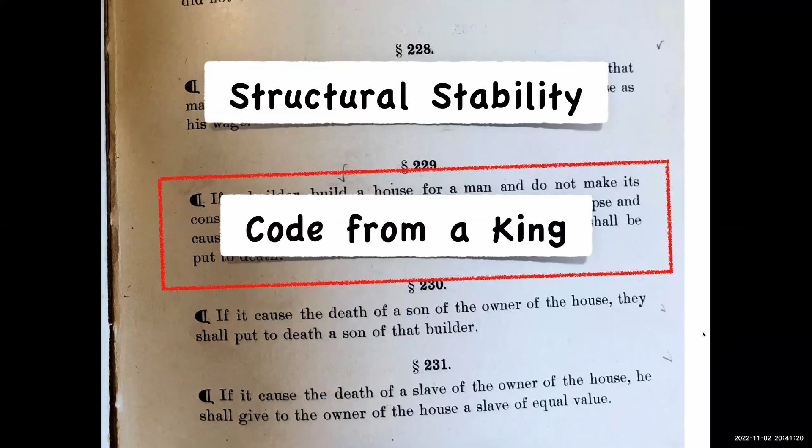It's very top down - essentially structural stability. I'd say that's the first code we had, focused on structural stability. And this was a performance code - there's no recipe here to tell you how to do this, to help assist this builder in building this house. It's simply establishing the performance that's required, and if you fail that performance, well, then you've got your consequence.

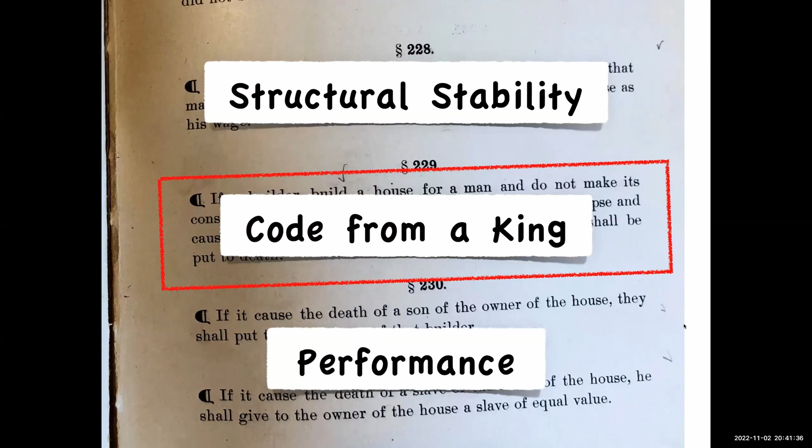Now we can move on. I told you we were going to talk about religion, didn't I? I gave you the warning. Let's crack open Deuteronomy 22 here. And what do we have?

We have number 8: 'When you build a new house, make a parapet around your roof so that you may not bring the guilt of bloodshed on your house if someone falls from the roof.' So is that arguably older? Well, who knows? Let's see what we have here - that is fall protection, right?

So I'd say guards maybe is our second code that we ever saw come around. But I'd argue, I don't see anything there saying make a parapet to keep someone from falling - so maybe it's really guilt protection. Because that seems to be the performance expectation - the goal, the purpose of this code is about protecting your guilt, not protecting the person. Well, there's an example of what code would look like written from God, and you can reserve your opinions of the author.

But let's move along, because parapet - if you look at parapet in the natural world, if you go to just normal definitions, indeed a parapet is a guard of sorts, to prevent you from falling over, to prevent you from getting shot by an arrow with the attack of the castle. But as you see in the photo I have here today, parapets are different in building codes.

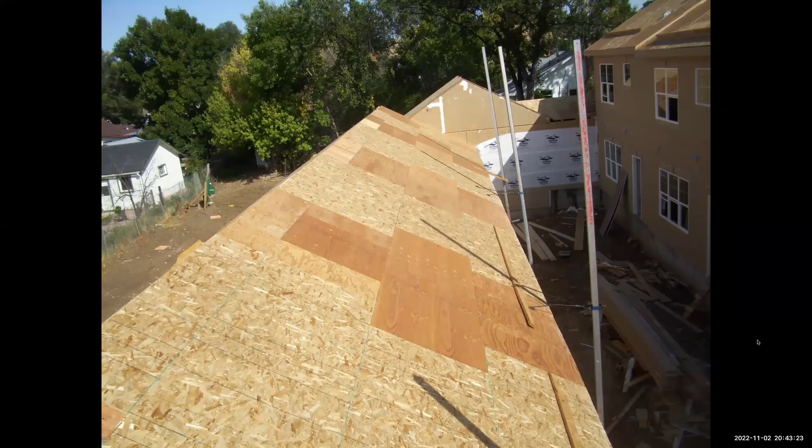These multi-housing units, say 5 families in one building - what are society's expectations? Society's expectations are that we have zoning ordinances in our cities. We don't want to look like some trashy city with a bunch of multifamily and all these freaky parapets. So the zoning ordinances across this country want it to look like one beautifully architecturally designed structure, essentially eliminating the parapets. And what we see used is an exception to parapets.

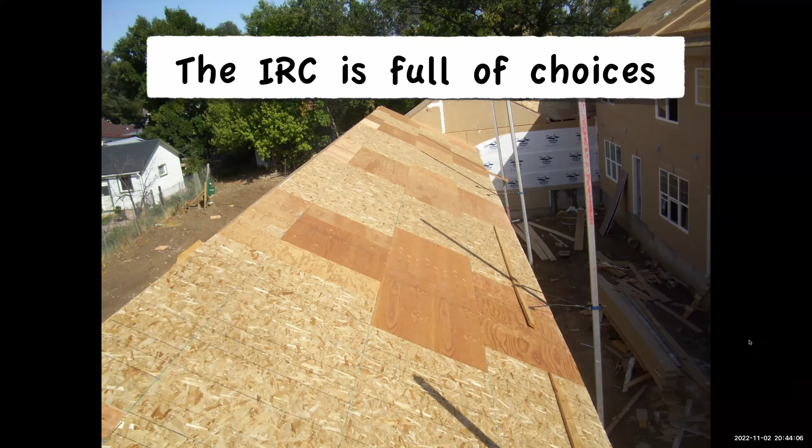The exception's almost the rule, and that's the fire retardant treated... The purpose of this is to show you the IRC is full of choices, but the old methods are still there. You can still build an extension of your firewall into a parapet for your fire separation between townhouses. But you can also do this - there's another method with drywall. If people just look at the code as a book of government mandates and never open it up to explore it for themselves, they don't realize the enormous amount of free choices they have.

Let's move along in time and hop up to 1808. This is one of the prized pieces of my collection - it's the newspaper, the Washington Advertiser, from January of 1808. In this, there is an article where the President of the United States and his declarations of building codes are reprinted. You can see that right here.

Now, who's the President of the United States on the 17th day, October 1791? Those of you that appreciate American history will recognize how that date is really close to the birth of this nation. That's George Washington, our president. George Washington was writing codes for the city of Washington. And what was his code? All outer walls of houses shall be made of brick or stone with slate or tile shingles.

Yeah, that sounds like the code of a president, right? The one percenters. You know, though, as you read further, it says, well, even though we knew that stone and brick and slate and tile would certainly eliminate the fires burning our cities down - I mean, that's the perfect solution - but this act was found to impede the settlement in the city of mechanics and others whose circumstances did not admit of erecting housing authorized by this act.

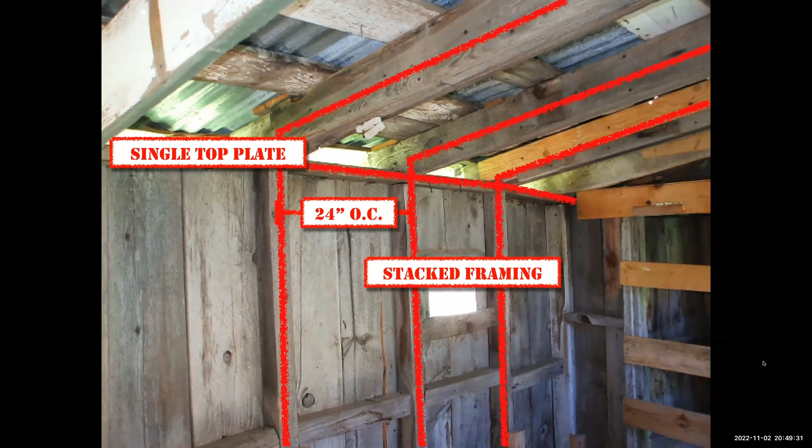All right, let's fast forward in time a little bit and hop into 1892 and look at the rest of the cities in the US. Because remember, the presidents could only enact things for the city of Washington.

I said I may ruffle some feathers with some tougher discussion in this, but that's how I roll—I'm a realist. This is a voted and elected position, elected representatives leading cities, your mayors and whatnot. The city reflects their quality of politicking or whatever. How good of a politician they are is reflected in how great their city is. So if your city is catching fire every few years and burning down, well, that's not making you look so good, is it?

So what's the motivation? What might be behind the scenes in motivating the development of these codes when they're written from folks that have to be worried about getting elected again, and how nice their city looks in case they want to be city manager or mayor of the bigger city nearby in town? Well, that'll be a tough job to get elected for when your town's burning down.

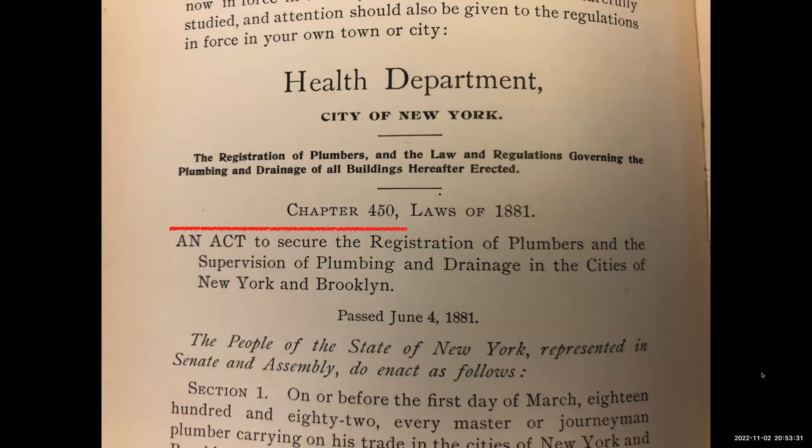Well, I've got this prize from New York. And if you're looking for sanitation codes, plumbing codes, the term plumbing code is only going to take you so far. To go way back in history, you have to start searching the health department for health codes. And doesn't that give a clue of the intent and purpose of the origin of our concerns with plumbing? Our health, right? We're dealing with the need for potable water to put in our body, as well as the awful stuff that we send out of it. And so it was all wrapped around protecting society for their health.

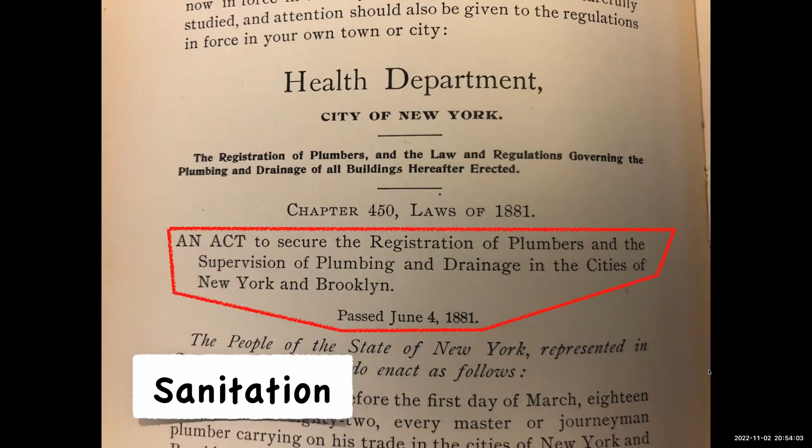Now, this is 1881. In the plumbing and drainage section in 1881, it said suitable drawings and descriptions of said plumbing and drainage have to be submitted and placed on file in the health department. They have to be reviewed and approved.

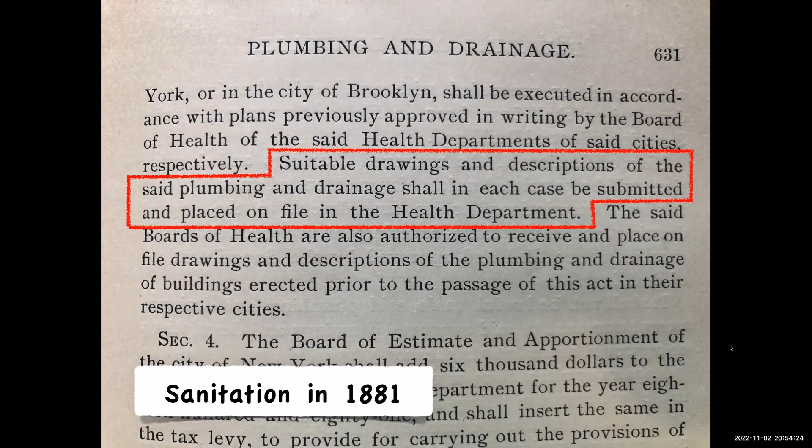1881. Now, I want to pause and give you some pulse of 1881. In 1882, the Edison Electric Illuminating Company in New York was formed and brought electric lights to Manhattan. So we are talking about the dawn of no longer lighting our homes with candles. That's how old we're talking.

Have you guys ever seen the movie Gangs of New York? This movie was set in 1862. And those of you that have seen this movie will understand this joke: I do not want to be their plumbing inspector to turn down any of these guys' plumbing, nor would I have wanted to ask them to review and approve or submit plans. So I tell you, your plumbing inspectors were pretty tough back in this day. And if you haven't seen the movie, it's relatively violent, and it was actually an entertaining movie.

So what else did we have? This is still in that health code for 1881: heating, cooking, and illumination. And there was this crazy new concept coming along, fuel gas. It tells us the use of gas for fuel and illumination have increased enormously within the last decade, and there's a general tendency among manufacturers and also among domestic users to employ gaseous fuel in preference to coal whenever practical or practicable.

There was also some interesting language back in these old books. So what I find interesting here is this speaks to society's expectations, and their expectations changing as our technology and available resources were changing and expanding. But what we saw back in the past with code development is, like I said, with the IRC, we can maintain and still allow the older methods - make sure they're safe, make sure they're done correctly - while still embracing the new methods.

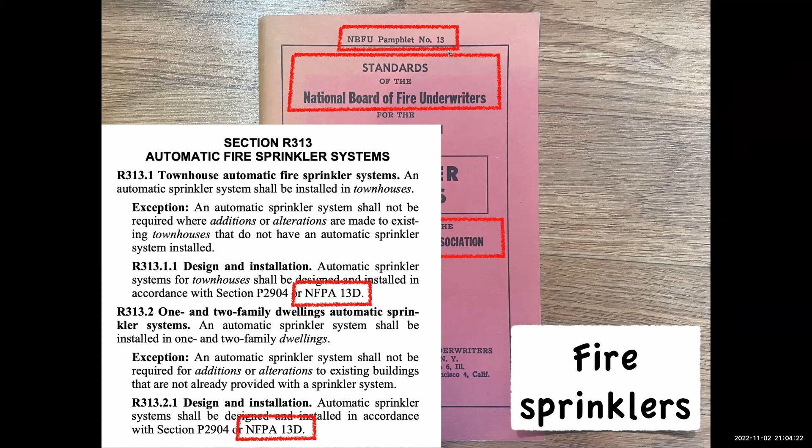What else was born? We can thank the Board of Fire Underwriters also in the late 1800s and early 1900s for supporting the National Fire Protection Association in creating the NEC. And you see it again in this old NEC book of mine, sponsored and paid for by the Board of Fire Underwriters and recommended based on the professionalism and experience of the Fire Protection Association.

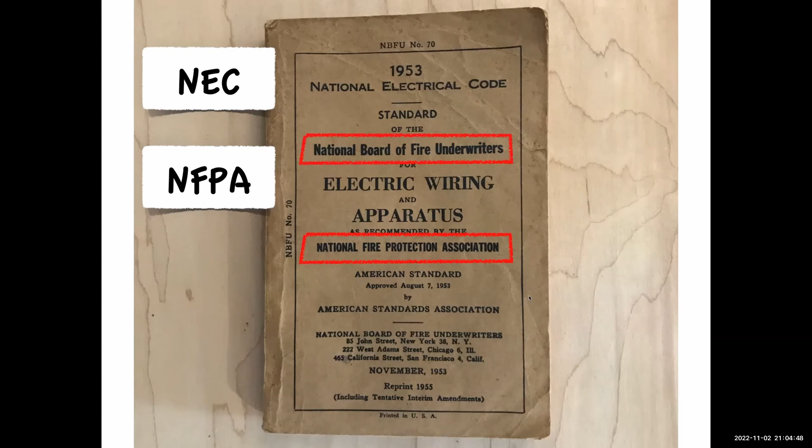And what do we see now? Now what we have is code drafted and developed from the fire industry. Of course, these organizations that led this development had a very open door policy, lots of people involved. So now we still have NFPA 70. Notice the same concept: it used to be NBFU number 70, and now it's NFPA 70.

But what's another thing we might do to protect against fire? This is where the NFPA, something now promoted and moved along by the NFPA, not the national board anymore, after the NFPA has been created, says, hey, we're not just about protecting our dollar investment of having to pay back a burned down fire or city. We actually care about the human lives as well.

And the National Board of Fire Underwriters did as well—I don't mean to say it that way. But what was realized is maybe we can't put all the fires out. Maybe we also need to think about egress. So in the early 1900s, I think around 1918, maybe the first edition, a code called the Building Exits Code was developed.

This is the first time we started studying egress behavior from panicked occupants. How many exits do we need? How far apart can they be? Related to that is a time factor: how quickly are these buildings burning down? That's all part of the analysis we still do today. Our buildings are burning down a lot faster, and our products and finished materials inside them are different.

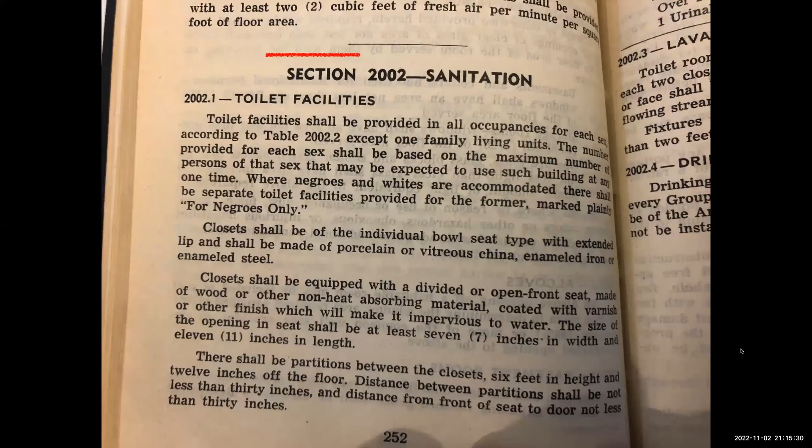Let me introduce you to the Southern Standard Building Code that was adopted in Birmingham, Alabama in 1945. My friends that appreciate American history may know that that's prior to the Civil Rights Act. What kind of life safety and sanitation might be published in a building code? I'm not going to read it, I'll let you guys read it. Remember, this is for educational purposes only. There's no more argument, I don't believe, that building codes have never been only about life safety. This is from 1945.

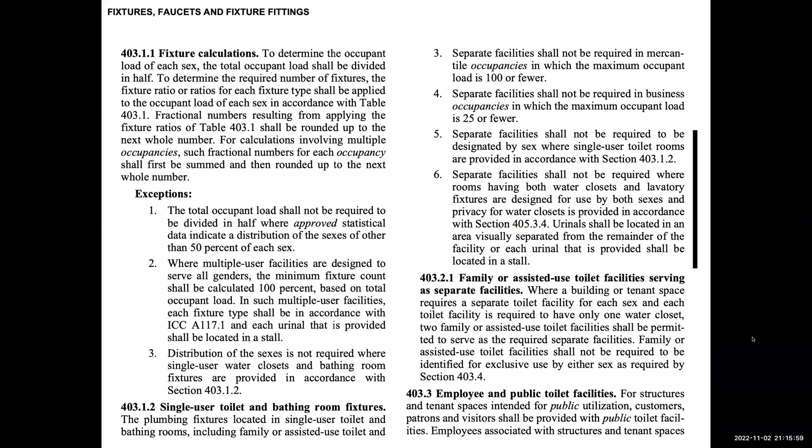And so as society's expectations change, thank God we change the code every 3 years, right? So we can get rid of our expectations of the past, and we'll have new expectations of the future to argue about, I'm sure.

Here's a little taste of 2021 and how society's expectations for bathroom signage is indeed changing. We have this new exception where you no longer have to provide separate facilities for both sexes. You can provide an all gender or multi-gender bathroom option in the code for those that would like to make that choice based on changing society's expectations.

All right, that was a tough subject to get through. So let's move on to the post-World War II housing boom. Lots of folks coming back, ready to have babies with their wives, and we had lots of homes being built. This is when we start to see building codes really focus more on dwelling house construction—that's what they called it back then, dwelling house.

Prior to this time, you had some suggestions for residential homes, but most of the residential provisions started with tenement housing, to protect tenants from abusive slumlords. You didn't get into single family rules, actual codes and regulations, more prevalently until after the war, and we started building so many houses. So we see these little pamphlets created—simplified versions of the full code to apply simply to houses.

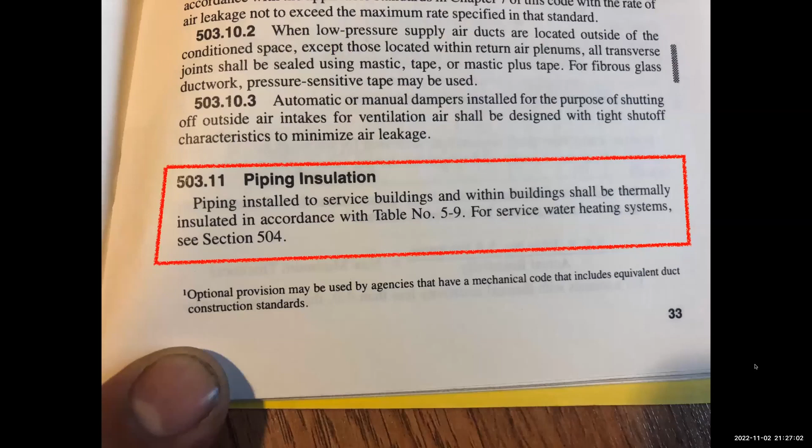And so we had this model energy code developed. I don't have the first edition, this is 83. But think about this: society's expectations—do you think this model energy code had society's expectations embedded in it, or do you think it had the federal government's desires for society embedded in it? I think you know the answer, because we can open this 1983 code and see things like piping insulation, insulating your hot water pipes. But that didn't really take off.

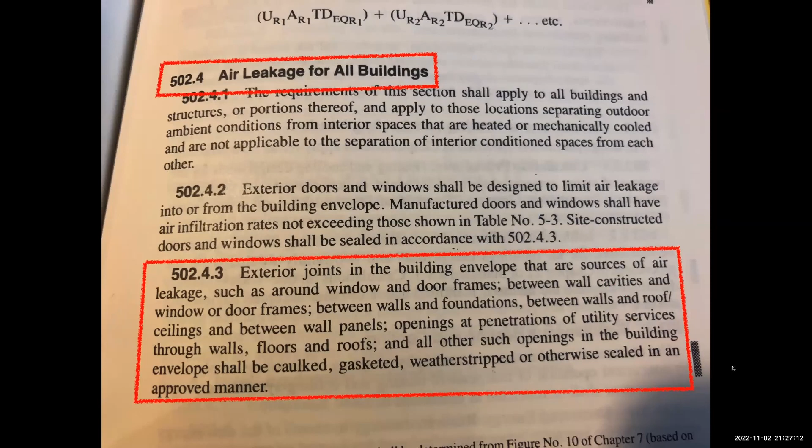Or air leakage for buildings—yes, in 1983, codes for sealing up air leakage and air barriers. That wasn't really popular in the 70s with society, as well as air handling and duct systems and insulating these. So the guidance and the motivation to enhance these energy provisions was there, but it did not come from society, and therefore it wasn't really embraced.

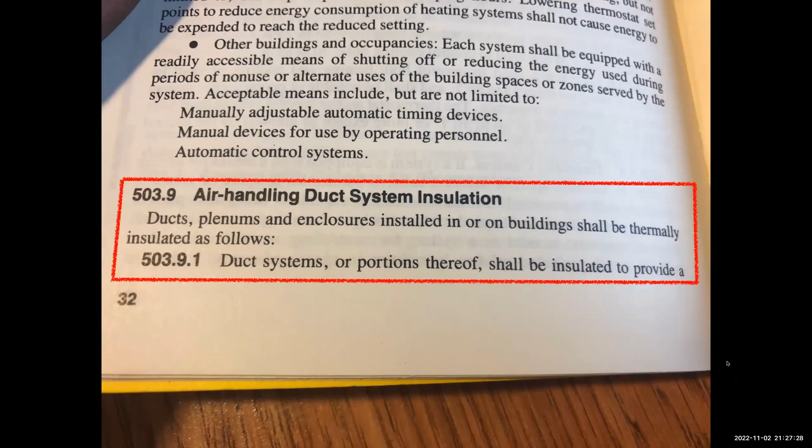Now we get the International Code Council formed in 1994, and you start to see a change in the residential codes. This is just a fun little snapshot of how this evolved. CABO 1 and 2 Family Dwelling Code—the original ICC residential code was called the International 1 and 2 Family Dwelling Code. That's really the original actual IRC. And then we, of course, have the first edition in 2000.

In all of these, remember I said electrical codes got embedded into the CABO code in 1995, but the energy code was still separate. It was still this outlier, still this thing that really the federal government was all about trying to promote. It didn't come up through the grassroots way. It wasn't until the 2000 IRC that energy conservation provisions for the first time got included right in this book. And now we have every trade—electrical, plumbing, mechanical, and energy—right in here.

But some examples—it wasn't until 2009 that you saw vapor retarders for heated exterior pools be required. Then in 2012, it changed to say, okay, if 70% of that energy is coming from renewables, you don't need to cover it. That first appeared, again, in 2009—but not really, it didn't first appear then. It was back in that model energy code by 1983 that, again, didn't really get widely embraced.

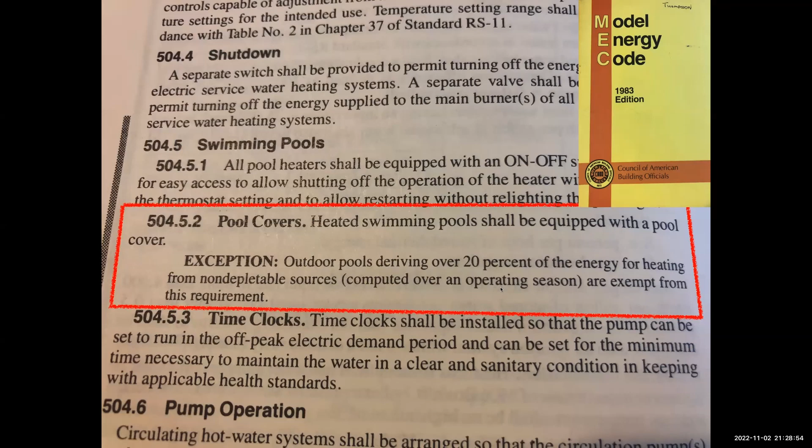Now, remember, the ICC just creates books. The International Code Council, like the National Board of Fire Underwriters, has no governmental authority. They are just an organization that tries to put together the best recommendations to try to encourage governments not to write their own codes, but to adopt these. And so those three organizations came together, and now we have this one International Code Council.

Because society's changing. That's why we got to keep chasing society, and that's what the code does. It follows society. Society gets new technologies, new ideas, new expectations. Then through a grassroots demand of society, we then see the proposals start coming to the code. And so code is a little delayed.